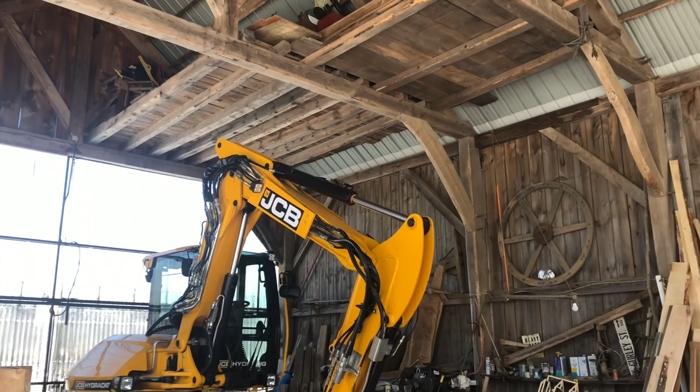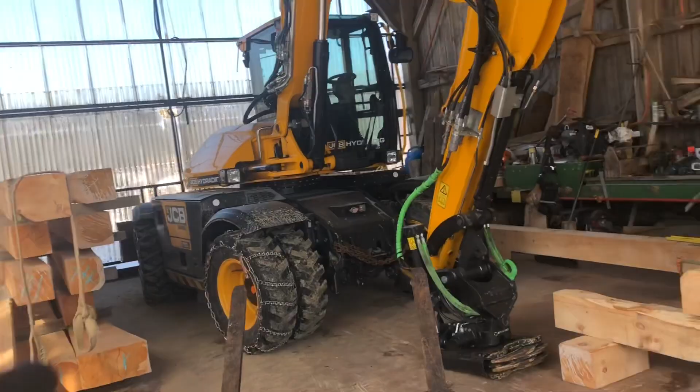My setup is to reach out with a tilt rotator on the end of the excavator and a set of forks. You can just hang a strap off a fork and pick something up. I have plenty of reach, and in my shop I have aircraft hangar doors on either end. This door here is malfunctioned right now, so I've got to fix that, but I could come in from either end and move pieces around. So I have full access to just about any size building I would want.

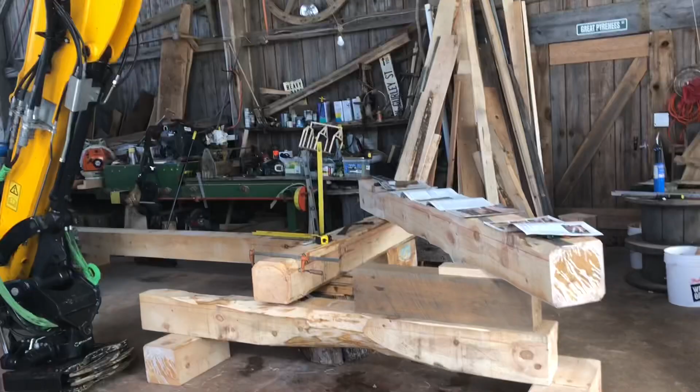The restriction is that my building's only 30 by 60, and then I have stuff, just like that right there. But you can't throw some of that stuff away too soon. That's a done pile. Again, a tilt rotator on the end of an excavator. I can lift, did it lift that? Well, I can almost move that pile with this machine.

I can move it around enough in here to shuffle blocking, but if I took two timbers off the top, it would go really well. I could handle that all over the place.

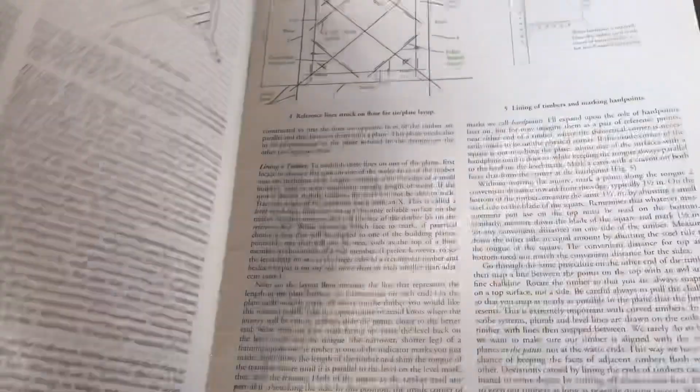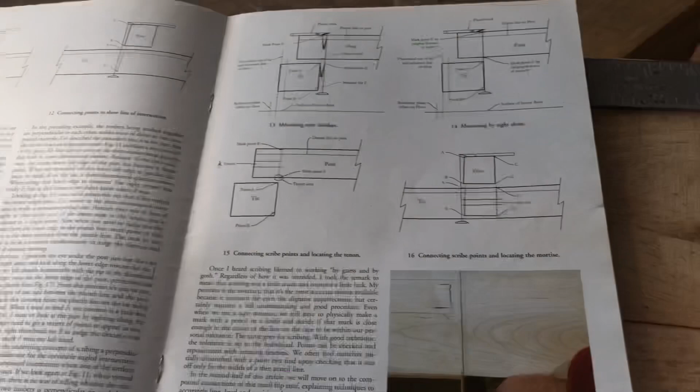So these are some, this is an old one, June 2005, number 76. This is 2010, and that's the start. This 2010 is Plumb Line Scribe. Glenn Dodge, Will Truax, Tim Whitehouse, he's the guy that made the plumb bobs. Credit goes to them. And this is a very detailed article in both of these issues.

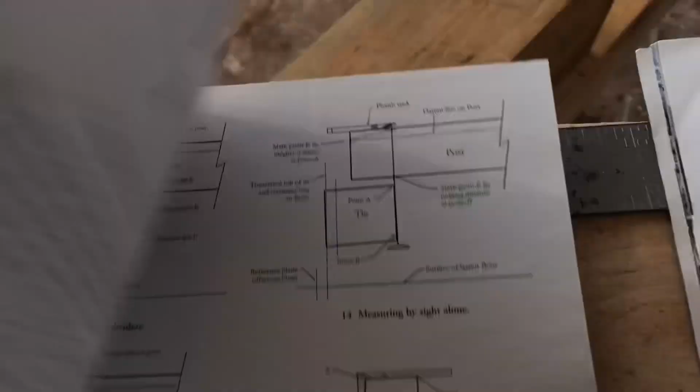So it was this one, and this one is the part series for that. Another one is just elementary building geometry, March 2011. And then there's another one in here that I haven't gone through all of, but this is kind of a hybrid system, more recent, 2019.

I mentioned that this one is an early one that has another variation, June 2010.

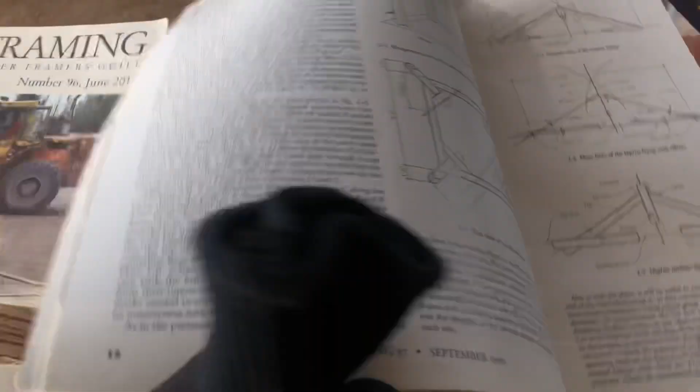I hear that Will Truax is considering putting together a more detailed compilation of information that covers this Plumb Line Scribe, PLS. That would be very handy to see in a standalone publication of some sort.

All of these back issues of Timber Framing are well worth becoming a member and logging into. A lot of them, I think, are on PDFs. Yeah, PDFs.

With a video off my phone and crummy lighting and whatnot, this isn't the best way to see this. Just reading about it will give you almost as much or better idea of how this works.

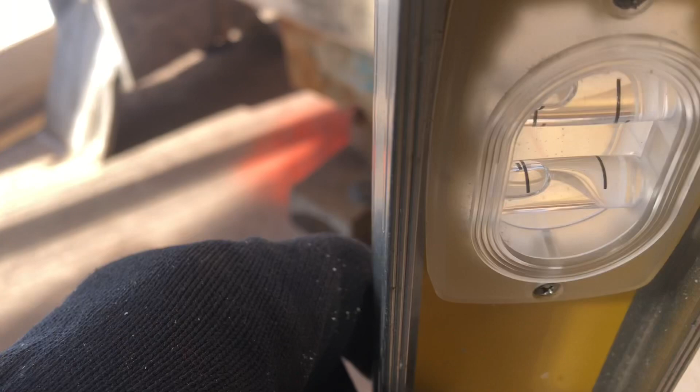But the string, first of all, there's lines snapped on here. We have feather marks, and you true all this stuff up based off your lines here, measuring the distance of this line to your outer line here, with a level in this manner, and then a straight edge to measure from here to the edge with your level, got two bubbles in it. So you level this, measure the edge, kick the timber in and out, do it multiple times until everything is right, because if we move one end, the other end is going to move.

We find on angles it's nice to snug the string right in tight and make all of your exceptions to twisted or turny timber. These are pretty straight, relatively new sawn timber, so we get less variations here than you do in some old piece of hardwood that's all twisted up, or even a spruce or whatnot.

And the other method is on a 90-degree piece, that you hold it off to the side and compare one bottom edge and the top edge and mark correspondingly. And then you do the top edge to here, and then you do the bottom edge to the bottom. All described in literature.

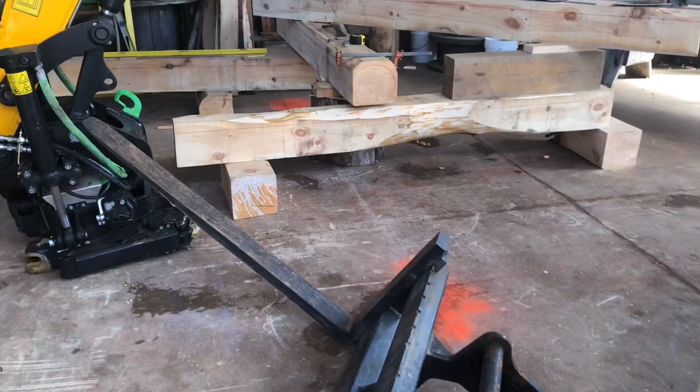Lots of tricks in blocking and shimming. There are little leveling wedges that go in there that you can turn and adjust just finely. They do a really nice job. Never used them, I've always just used shims. That works for if you're on a budget.

Dividers, even some at the ends turned out. There's a pair with the ends just slightly turned out so you can get right in tight to places. Like these, nice easy roller adjuster. Those are easy to use.

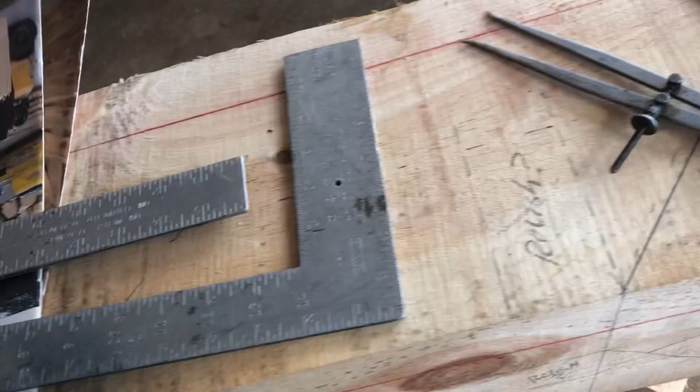Anytime you got old junk squares kicking around, these are great to just cut to shorter sections for using for straight edges and for measuring off your levels. You can't have too many levels.

When you set up a timber on the side, you measure off this snap line down here, and we put that on and put a clamp across the timber and hold it in position, and then you just place a level here. So this is when you use your level.

When you're laying out your feather mark and snapping your lines, you're just eyeballing from one end at your joinery to the other end at your joinery and to about the middle. So you're taking the wind or twist out of the timber by eye.

Give a short picture of that. So you put a straight edge across here, and on the other end, this is all in the book.

You'd sight across, you see it across this to the level, and shim this up or down, or plane this across to get a 2-inch mark. You mark it here, and you mark it down there, and underneath you can mark all 4 sides or 8 lines just from this one position.